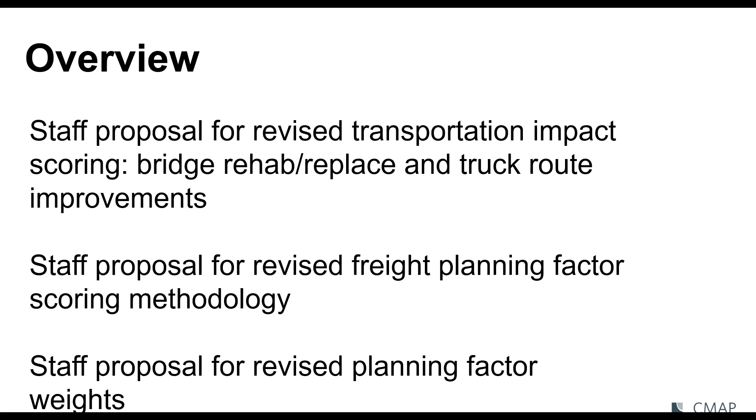I do want to note that there was a revised slide deck that was posted yesterday. So if you downloaded a copy at an earlier date, you may want to go back and grab the updated version from the committee meeting materials webpage. That's actually what Cam is going to be going through now. So I'll turn it over to Cam. Great, thank you, Jesse. I think Jesse pretty much covered this introductory slide, so I'm going to jump right in, starting first with the bridge rehab and reconstruction projects.

Current methodology uses the National Bridge Inventory, the NBI, sufficiency rating to define need by subtracting that rating from 100, which is the maximum rating for a bridge. The improvement score also uses a sufficiency rating adjusted based on IDOT's major bridge program factors for project scope and the functional class of the road.

Also, as a reminder, most of these bridge projects involve multiple individual structures. So based on the sufficiency rating, CMAP staff first identifies what is considered to be the most critical structure in the group for the project and uses only that structure for scoring both the need and the improvement for the overall project.

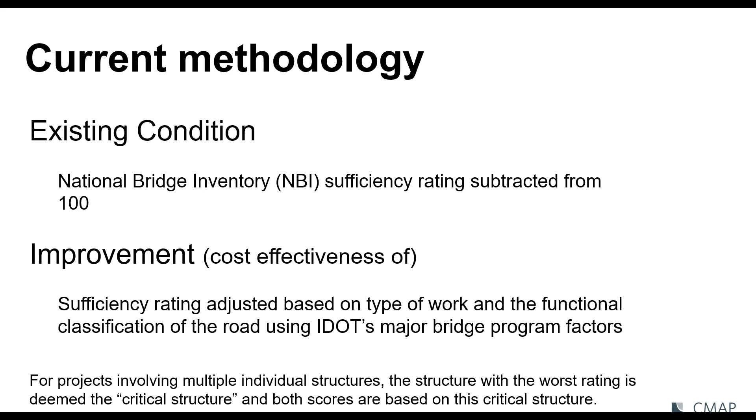So since the first call for projects, we've heard from stakeholders that the adjustment factors could disadvantage constrained urban bridges because they're based on standards that are unachievable in those dense urban environments, and that the full scope of project improvements may not be captured when we look just at the overall sufficiency rating of these bridge projects.

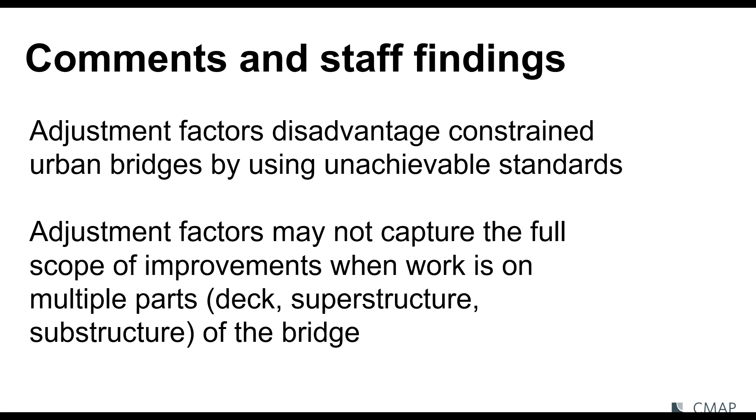So based on these comments, staff proposes no changes to the existing condition scoring, since sufficiency rating provides a good overall assessment of the condition score for the structures. However, we are proposing changes to the improvement score methodology, shifting away from the IDOT adjustment factors to dig deeper into the individual elements of the structures to score based on the potential impact of the project on the deck,

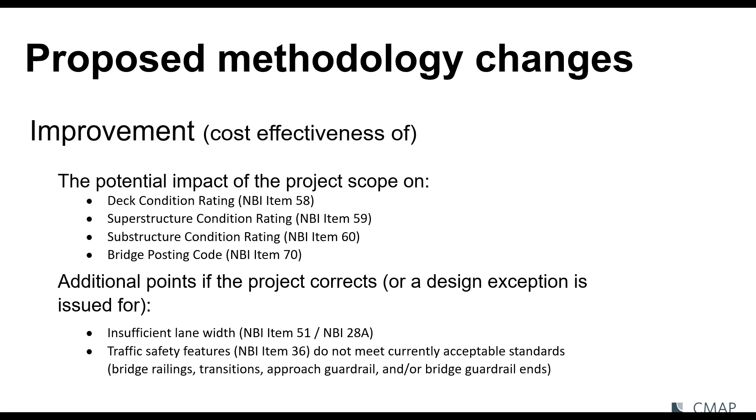the superstructure, and substructure ratings, the degree of load limits posted on the structure, and also additional points would be given if the project corrects insufficient lane widths or improves structure-specific safety features like railings, transitions, and guardrails. So the total improvement score would be the sum of these individual element scores.

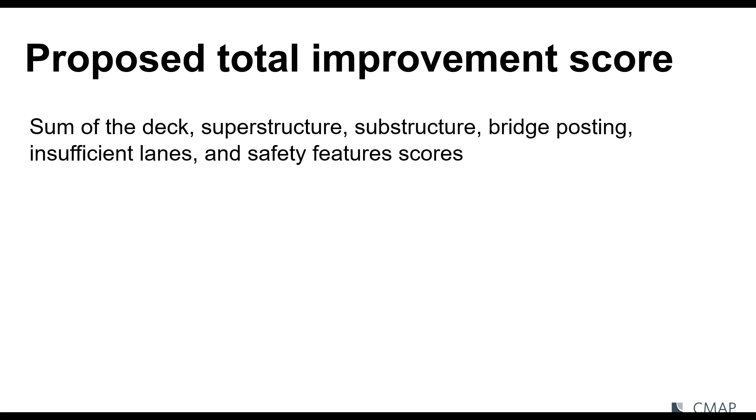When determining how much improvement is likely due to the project, we're making the following assumptions. The full replacement of either the entire structure or one component of the structure would result in the achievement of a maximum condition rating for the replaced element. A partial replacement or rehabilitation of a component would result in achievement of a satisfactory rating for the component, and

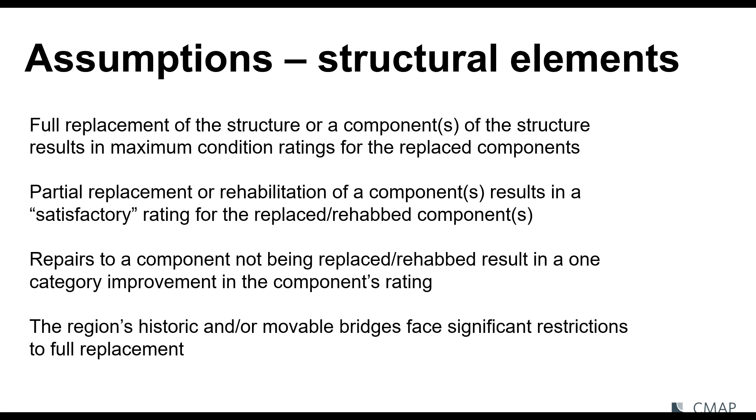that other repairs to a component that's not being replaced or rehabbed would result in a one category improvement in the component's rating. Also, we're assuming that our historic and/or movable bridges can face significant hurdles to full replacement. So with these assumptions in mind, the scoring for the structural elements would look like this. And the scoring criteria are shown there on the right-hand side of the slide. So that's the NBI scorings all the way from 0 for failed up to 9 for excellent.

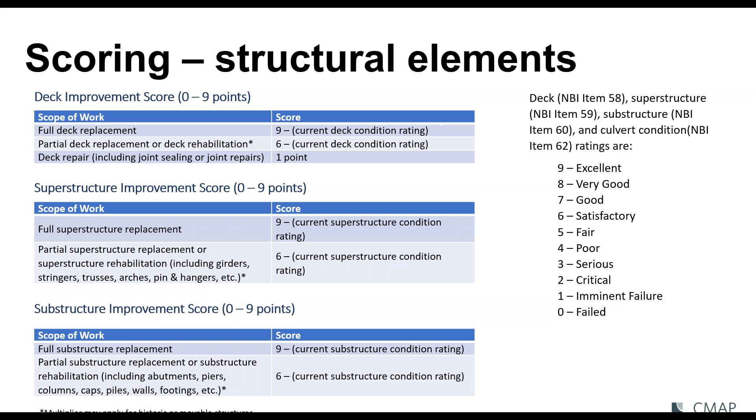So full replacement of any element, whether that's the deck or the superstructure or the substructure, would be scored receiving points equal to 9, that highest rating, minus the current rating for that element. Partial replacement or rehab would receive points equal to 6, which is the value of a satisfactory rating, minus the current rating for the element. Elements not being replaced or rehabbed that were being repaired in some manner, such as joint sealing, for example, would receive 1 improvement point for that particular element.

Qualifying structures in this case would be those that are on or eligible to be on the National Register, or those that are designated as a movable structure type. For structures that are coded in the NBI as maybe eligible or unknown, staff would consult with the state bridge database and/or seek additional information from sponsors to make that determination.

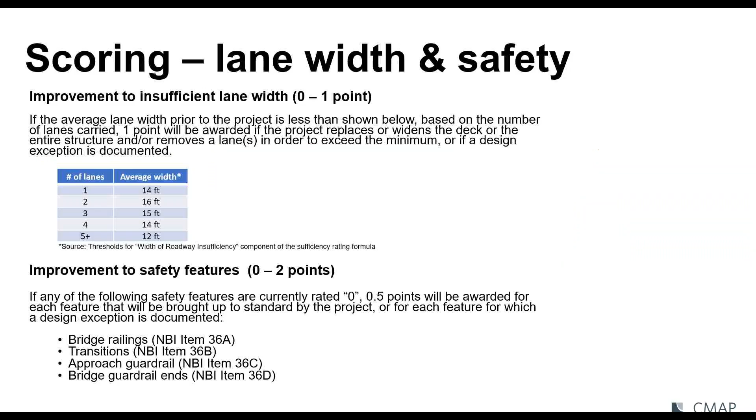Okay. All right, questions or comments from the committee? Luis Benitez from CDOT. I have a question on item number 70. On 70, if you don't do a full replacement, but you do take out the posting, what is the rating? Because basically the rehab was done, no more posting required. Is that a 5?

Yes, that would be a 5, and we're relying on you as the sponsor, if it's not a full replacement, to provide that estimate of the change to the load posting. Yeah, the goal is always to remove the posting. I just want to make sure that if you do rehab, you don't never get a 5 even though you remove the posting. It's just clarification. Yeah.

Right. So looking at the federal ratings compared to the state ratings, I think a 5 or a 6 on the state rating would be equivalent to a 3 here. And so if it was a 5 or a 6, qualified but not yet listed, yes, it would receive the multiplier. And the SI report basically is yes or no. If you see that rating, it doesn't give a number, it's just yes, historic significant or not.

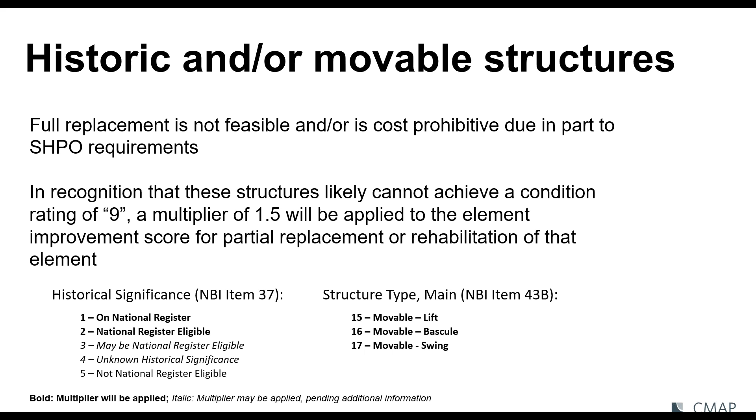Other questions from the committee or comments? I don't see anything in the chat box from anybody in the audience with questions, but I do want to give an opportunity for those on the phone or anybody else to raise them if they have them. All right, well, I'll take this as a near perfect job by Kama. We'll move on to the next thing.

All right, so our next topic this morning is the truck route improvement projects. Currently, the existing conditions are measured by 5 equally weighted factors. The pavement condition, safety, reliability, and mobility, those first 4, we also use for our road reconstruction and expansion projects. And then truck volumes are also an equally weighted factor for the truck route improvement projects. Improvement is measured by the improvement to the mobility factor, as well as inclusion of certain systematic or incident-related strategies.

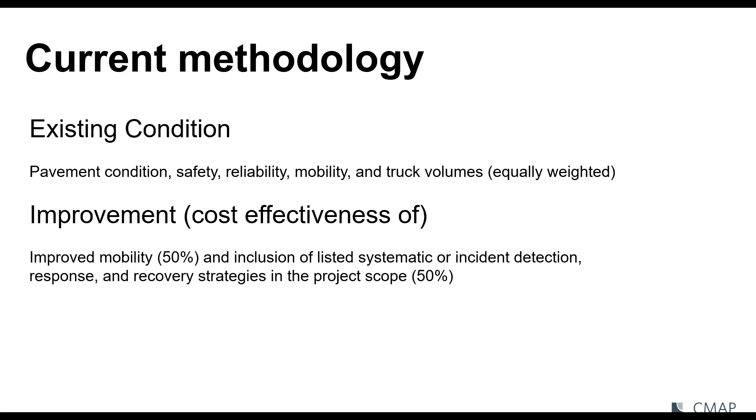So through comments and staff discussion, we're concerned that the scoring doesn't really consider geometric deficiencies like vertical clearance limitations or inadequate turning radii, things that inhibit truck movement. And we're also concerned that no consideration is given to the negative impacts of truck traffic on the surrounding area.

So with that in mind, staff is proposing retaining the existing conditions factors, but adding to that a consideration of geometric deficiencies. And then when scoring improvement, staff proposes retaining mobility and systematic improvements, but making some tweaks to what those systematic improvements are. Also incorporating the geometric improvements and mitigation of negative impacts in the improvement score.

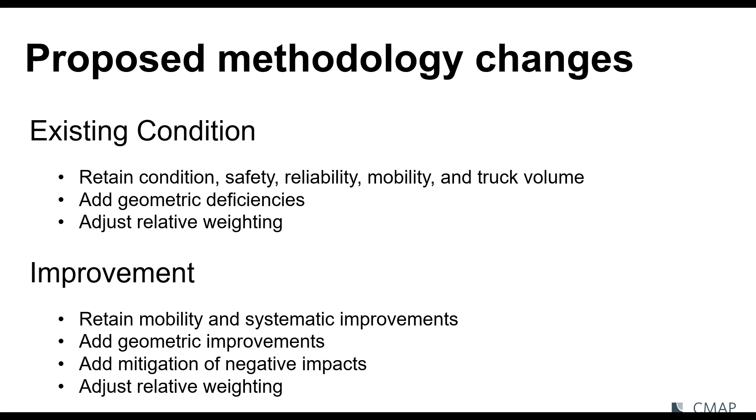So to rebalance the existing condition score, staff proposes that we place a little less weight on pavement condition and safety in order to give geometry an appropriate weight relative to reliability, mobility, and truck volume. Geometric deficiencies are proposed to be scored based on the presence of weight-restricted bridges or vertical clearance restrictions within the project limits. So either, yes or no, there are or aren't a weight-restricted bridge or a vertical issue.

And then also the percentage of the project length that has insufficient lane widths, or the percentage of intersections within the project that have insufficient turn radii, or queue storage for the design vehicle. Insufficiency will be based on phase one engineering, or for projects that are requesting their phase one engineering, can be based on a planning level study, or kind of clear photo evidence of these deficiencies. I think we've all seen those corners where there's tire tracks over the curb and over the grass from trucks struggling to make the turns.

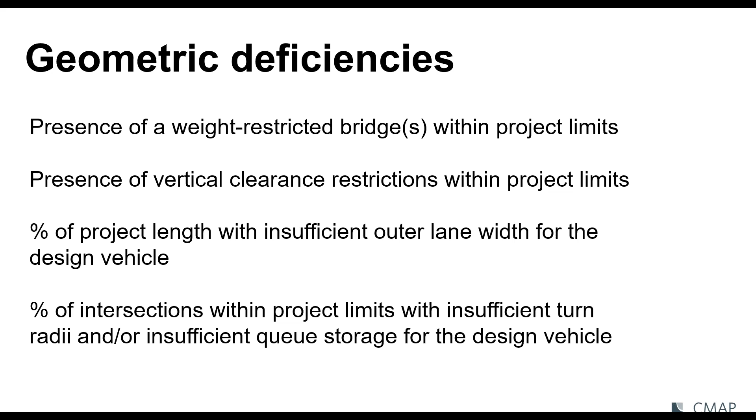For the improvement score, staff is proposing 4 equally weighted factors: (sorry for the background noise, the street sweeper is going by my house) improvement to mobility, reduction in geometric deficiencies, inclusion of a list of systematic improvements, and mitigation of the negative impacts. There would be no change to the way mobility improvement is scored.

For the geometric deficiencies, points would be based on the removal of those weight-restricted bridges or vertical clearance restrictions due to the project, as well as the amount of reduction to the percentage of the project with the lane widths, turn radius, or queue length deficiencies.

So for the list of systematic improvements that would qualify for points, this list is those improvements that, when implemented, can have a positive impact on the movement of trucks within a corridor. So just like in the first call for projects, as well as how we score CMAQ projects, points from these improvements would be summed up to a maximum of 5 points for inclusion of anything on this list.

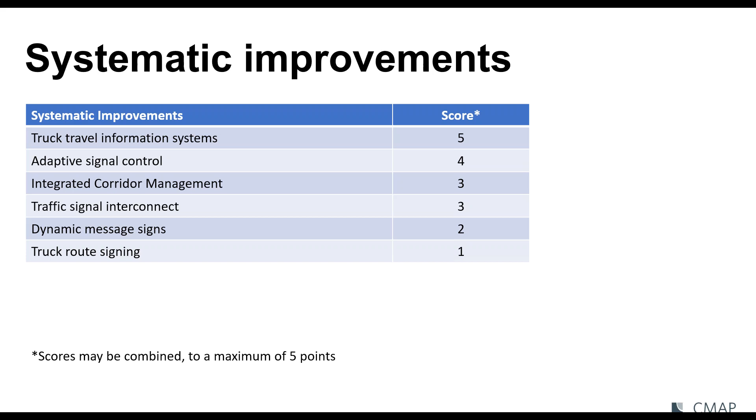Finally, recognizing that significant truck traffic can bring noise, pollution, and additional traffic congestion to an area, staff proposes awarding points for strategies that help to mitigate these negative impacts. Just like the systematic improvements, these points could be summed up to a maximum of 5 points.

So that sums up the proposed changes to the truck route improvement project scoring. Again, I'm going to pause for questions and discussion here before we move on. All right, questions or comments from the committee? Yeah. This is Jeff Schreiber. Thanks, Kemma. It also looks good. I don't know if you could go back to the slide just before.

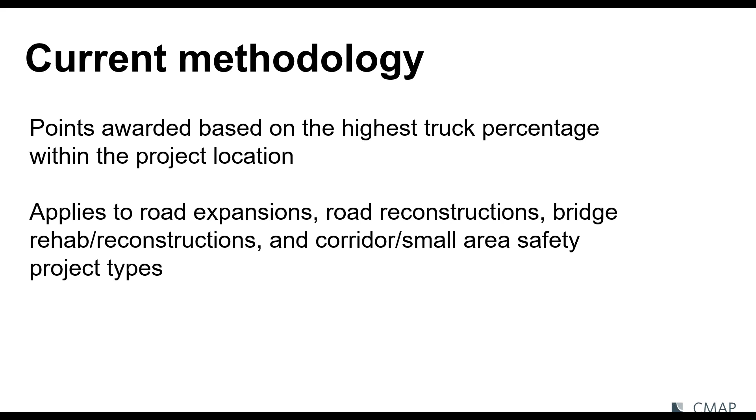All right, so shifting gears a little bit now from our project categories to our planning factors, starting first with the freight planning factor. Currently that factor was applied to road expansions, reconstructions, bridge projects, and safety projects, and awards points based only on the truck percentage for the project corridor. So this methodology really doesn't consider the project's role in regional goods movement, nor does it consider the planning and policy recommendations of ON TO 2050 related to freight.

We also received a comment regarding this factor suggesting negative points for the negative impacts of increasing heavy vehicles. As we just talked about for the truck route project, staff proposed points for mitigation as opposed to negative points. So for the freight planning factor, staff is proposing scoring it similarly to complete streets and green infrastructure, with a portion of the points based on the project's location on a regional freight network, and the remainder based on policies or procedures suggested by ON TO 2050.

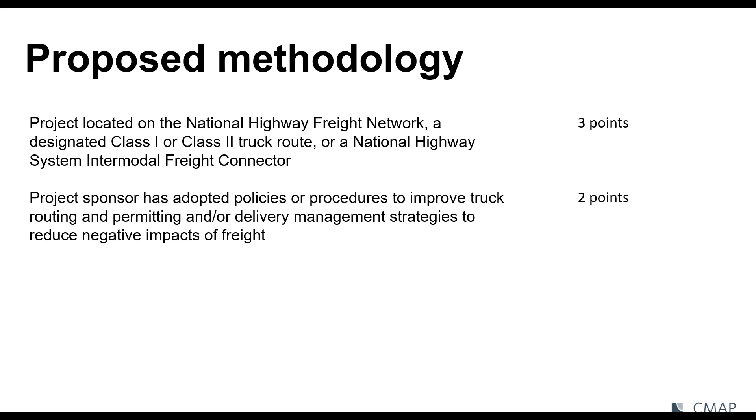Those policies and procedures are things like online truck permitting, policies intended to improve delivery management, such as permitting off-hours deliveries, active management of loading zones, incentives for quieter or less polluting trucks, as well as completion of truck routing studies or comprehensive review of truck restrictions within the sponsor's municipality. Projects identified in a local, county, or regional freight mobility plan would also receive a policy point. Each of these strategies would be worth 1 point up to a maximum of 2 points for the policies.

So that's the bulk of the changes there, shifting that to policy and away from just the truck percentage. So I'll pause for questions again as I lose my train of thought. Thoughts from the committee? This is Jeff. I think these are good refinements. I think they're all pointing in the right direction, addressing these issues. Some of these, it's a little bit tough to know how it's going to play out until we actually try to implement it. But I think it'll be better than it had been.

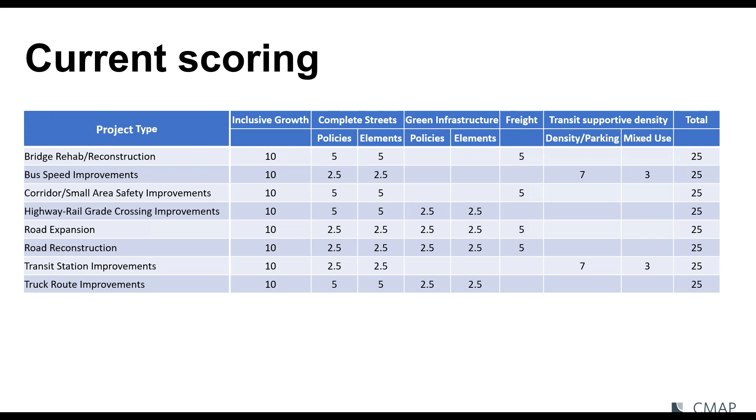All projects can receive 10 points for inclusive growth, either 5 or 10 points for complete streets, and then the other factors, the green infrastructure, freight, and transit supportive density are applied to select project categories only. So as it exists, up to 25 points can be awarded for planning factors.

So comments related to the planning factors included applying more factors to certain project types, questions regarding the scoring of inclusive growth, which we talked about not at your last meeting, but the June meeting, a suggestion for more emphasis for complete streets elements, which was proposed at your July meeting, and then consideration of the negative impacts of freight, which we just discussed a few minutes ago.

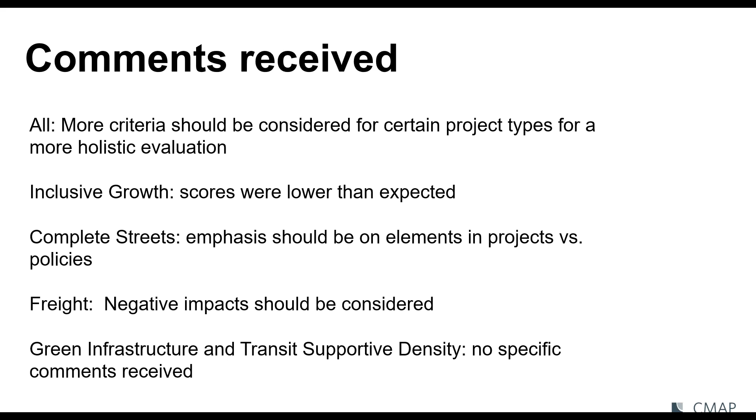So based on these comments and the availability of 10 points to add to our scoring scheme from the removal of inclusion in plans as a readiness criteria, staff is proposing increasing the total weight of the planning factors from 25% of the score to 30% of the score, with those extra 5 points being added to the inclusive growth factor, as well as incorporating the changes suggested earlier for complete streets and freight, and applying the factors discussed in June for the new bike ped barrier elimination project.

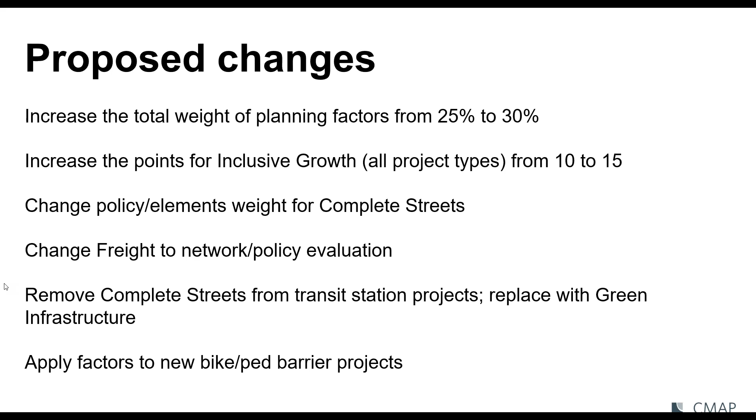Okay, well, this is not your only opportunity to provide feedback on this, and we do expect all this stuff to be finalized later on in the fall, and so you'll have a chance to call us or to email, and we'll document that and bring it back to the committee for consideration. So if there are no other questions, let's move on

to the shared funds status update. There's actually nothing to report here. We haven't received any more interim updates, so this is just a standing item on our agenda. We'll bring you more information when we have it. So I think there's a little more to say on the local program, and so I'll move on to agenda item number 6 with Mary.

Hi, good morning, everyone. So as of Tuesday, all local councils' public comment periods have closed. Final council approvals are scheduled throughout August and September. TIP amendments incorporating the new programs will be processed in early October for consideration by the MPO Policy Committee and CMAP Board at their joint meeting on October 14th. And that's our local program update. Okay, thank you, Mary. Does anybody have any questions for Mary? All right.

Well, at this point, I'll just ask if there's any other business for the good of the committee. Okay, hearing none, move on to public comment. This is an opportunity for comments from members of the audience. We didn't get any comments prior to the meeting. If you do want to give public comment, please let us know using the chat box, and just wait for staff to announce you before speaking. And I'll just give a couple of seconds for our slower typers. If anybody who's just on the phone would like to give public comment, please go ahead and unmute your phone and state your name, and I'll just give you a couple seconds to do that.